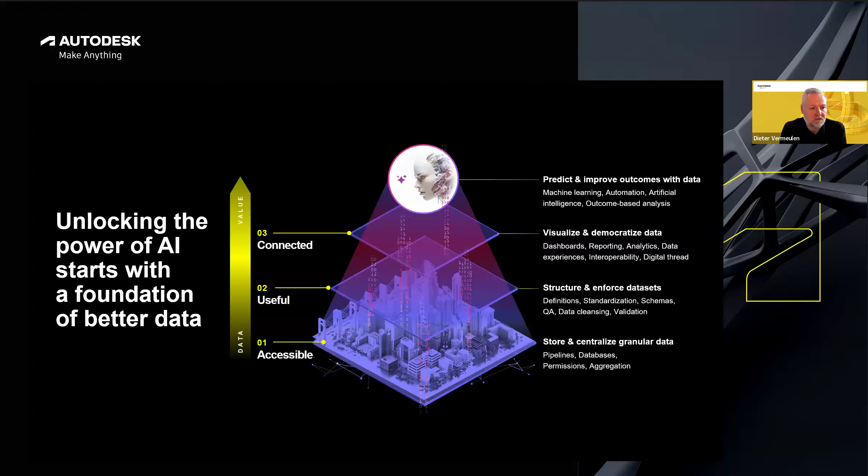But what does better data look like? We're moving beyond monolithic files toward granular information that cloud platforms can route to the right person and at the right time. Things like object counts, properties, materials, context, all of that available anywhere.

And by breaking design data into these small portable pieces and enabling interoperability, we make data accessible, connected, and useful. And the payoff, it's very straightforward. You get better decisions, less rework, and you get more trust across teams and stakeholders.

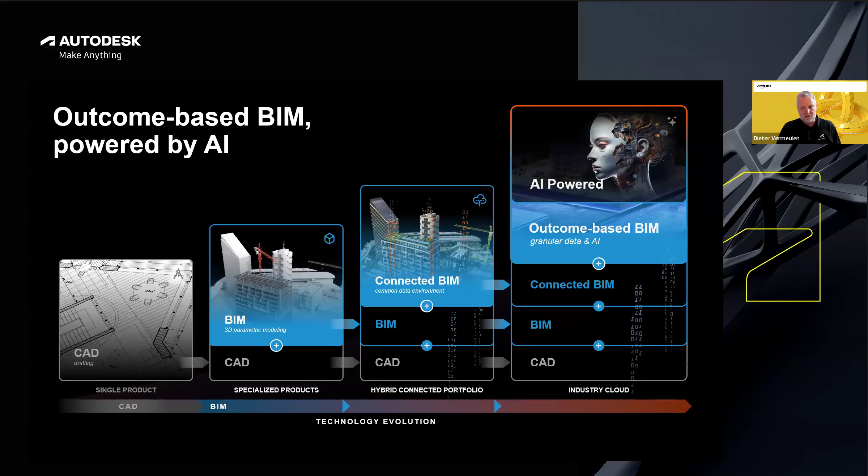Now, to unlock AI's promise, we need that right data foundation. First, we store and centralize granular data with the right pipelines and permissions. Secondly, there is structure and governance where definitions, standards, and quality checks are very important. And then we have this third layer, which is visualization and democratizing this data with dashboards, analytics, and also interoperable experiences.

And on that foundation, AI can automate the mundane, surface insights before decisions, and help us design and deliver more sustainable and higher quality outcomes. And all of that in a consistent way.

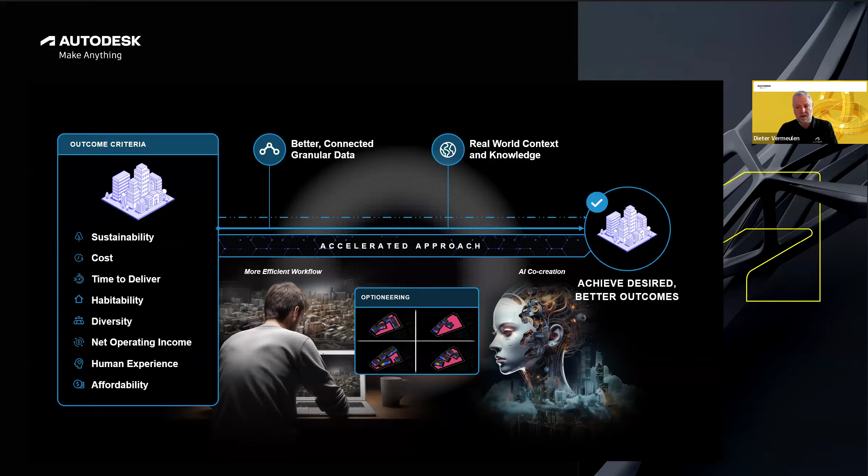Now at Autodesk, we are leading the way with the introduction of this new approach that we are calling outcome-based BIM. We started 40 years ago already with CAD and moved to BIM, where 3D parametric modeling was introduced. Connected BIM is where we started to include BIM into a common data environment. And then this outcome-based BIM is where we are going to use that granular data.

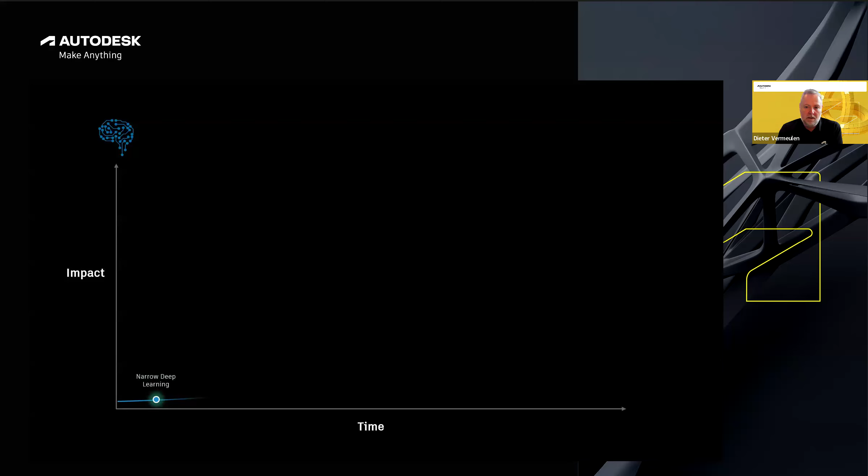And this innovative approach is integrating AI as a co-creator alongside the conventional model-based method. It's designed to empower AECO practitioners to define project success and overcome competing criteria.

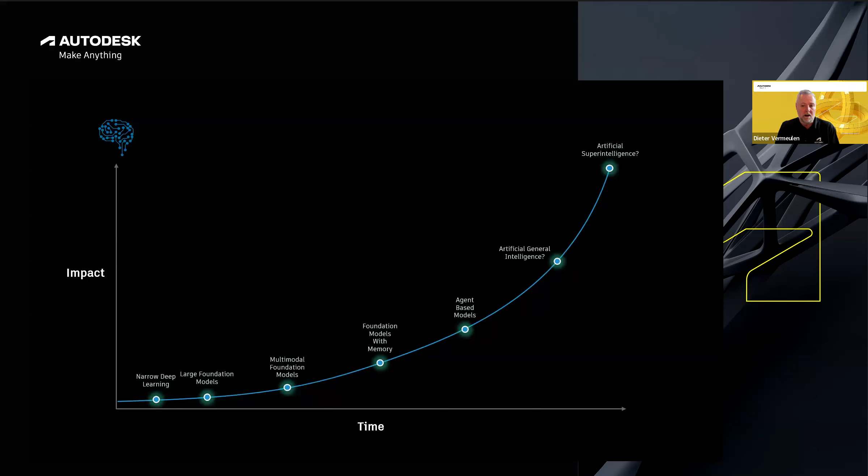Now, here is an example of what the future of BIM will look like. With outcome-based BIM, teams will define upfront their desired outcomes for the project. So things like maximum cost, sustainability impacts, or the method of construction.

Now, while AI generates a range of options to meet their criteria, and using AI-enabled analysis, firms are immediately getting insights into the impact of their decision. And they can shortlist the best options then.

So I want to be clear here, outcome-based BIM is not a replacement of model-based BIM. It's just a powerful additional way of working that will complement a model-based approach, and all of that powered by AI.

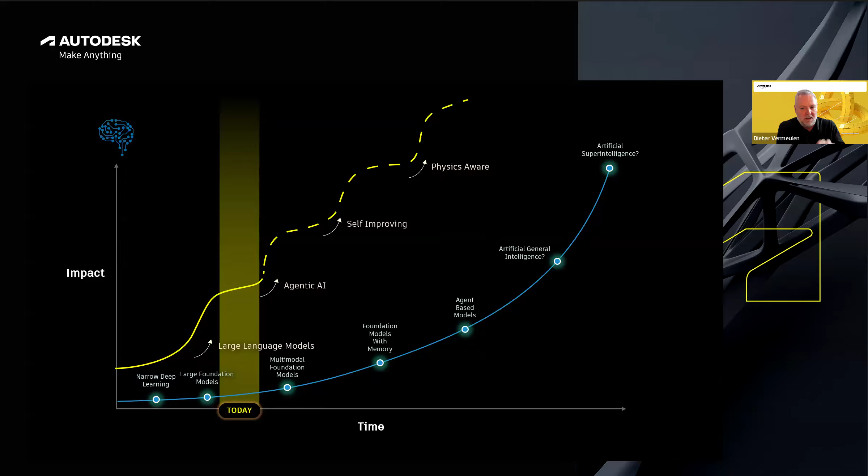Now, Autodesk has been researching and working in AI technology for over a decade. And if we explore the impact of the various AI models over time, we see that it started already with the narrow deep learning, and it goes further until what we know, artificial superintelligence maybe.

And what we want to see in here is that these are intriguing questions about the future of AI, including those possibilities of AGI, artificial general intelligence. And it's evolving and it will continue for many years.

We are just at the start of a new computing paradigm. Large language models, or LLMs, are the foundation of this modern AI. And they provide the intelligence to understand, reason, and generate language at a scale. So you can think of them as powerful text engines that can answer questions, summarize, translate, or even write code. So the LLMs are what we call thinking and understanding.

Now, today we are already a step further, especially within Autodesk AI. We are in the domain of agentic AI. And this is taking it one step further in terms of AI intelligence. So instead of only reacting with answers, agents can actively pursue goals. So these agents are making decisions and taking actions.

Now, while AI may seem like a new topic for our industries, Autodesk has been working in that AI space for over 15 years now. After publishing our first research paper on AI for design, for generative design at least, in 2009, we established our AI lab in 2018.

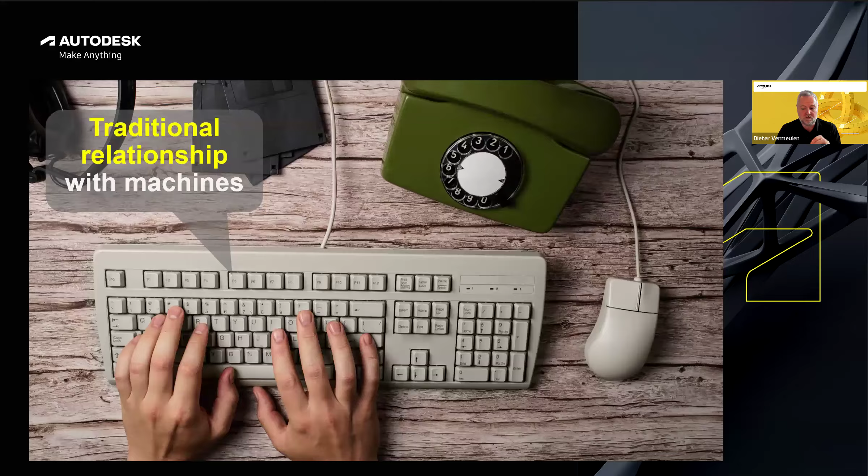In 2019, generative design officially was launched as a product. And in 2022, we published a 3D machine learning design file dataset in partnership with MIT in Boston, inviting other researchers to begin training their own 3D models. We then announced our first experimental generative AI model, which was called Project Bernini, at AU in 24. And now at this year at AU 25, we also announced Autodesk Assistant.

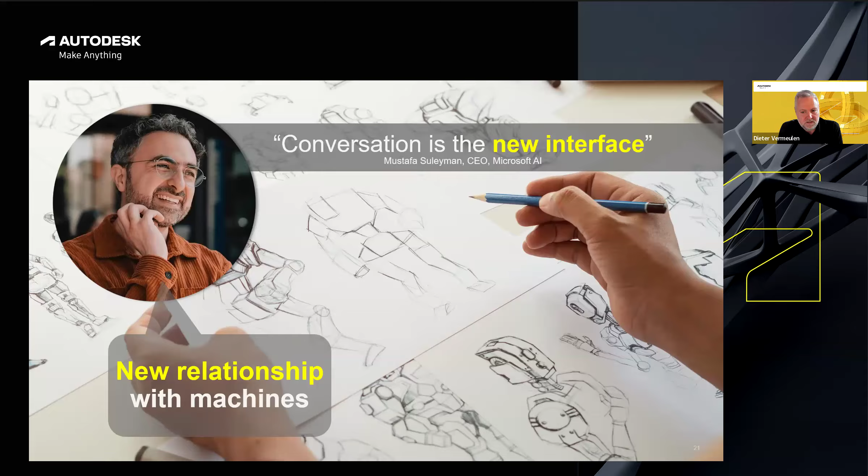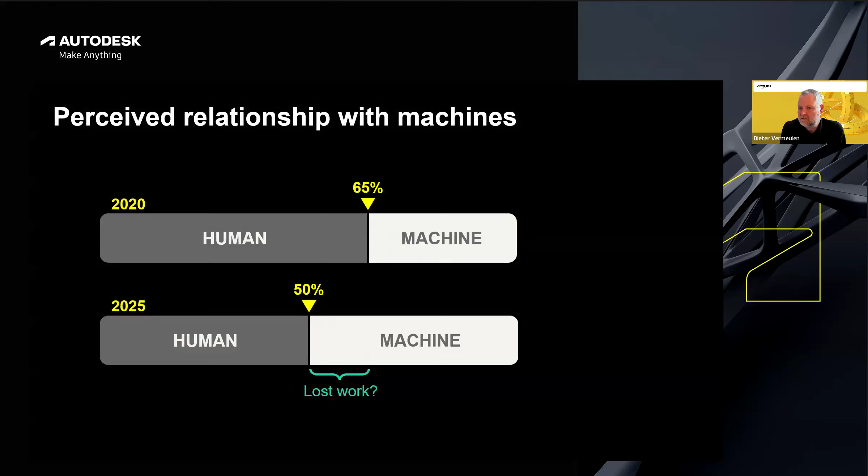Now, also something important in the development is that there is nothing more general purpose than creating that new relationship between humans and machines. As technology users, we have always had a relationship to machines, but telling a computer what to do is very hard. Until recently, our relationship with machines has mostly been limited entirely through this narrow interface of a keyboard and a mouse. We've normalized reducing these complex ideas and computing them in obscure ways. And that's starting to end, especially for creative professions, where it's most overdue.

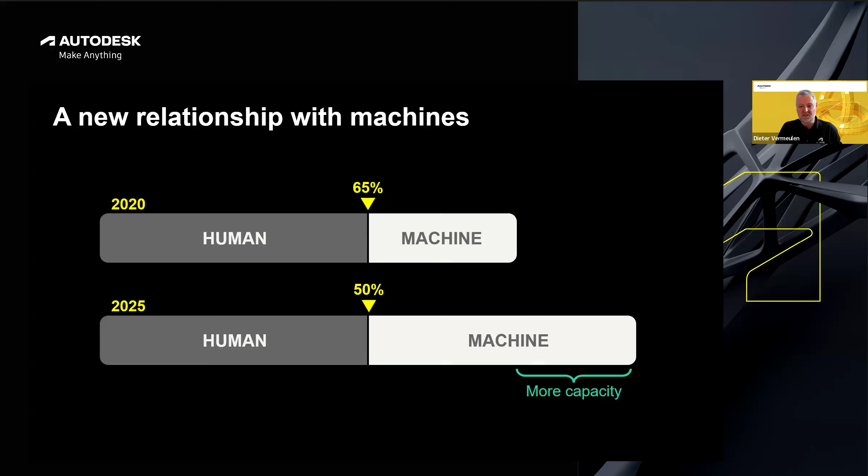So why is this moment with AI so unique? There is a new paradigm emerging that changes everything, which is the use of natural language and natural expression to interface with machines. As Mustafa Suleyman notes, conversation is the new interface. In other words, we will be interfacing with software in much the same way that we interface with each other. And the interface is growing even further, beyond natural language, to include hand-drawn sketches, gestures, photography, and even more.

So how does this new relationship affect the future of work? Well, the World Economic Forum thinks that we are on the cusp of crossing a threshold where machines do a larger part of a given task than humans. Many professionals we speak with fear that this represents lost work. However, while this may be true in some domains, the more optimistic picture is that for the same amount of effort from a human, the human-machine team can accomplish much more. In other words, humans and machines together can unlock additional capacity to do more with less.

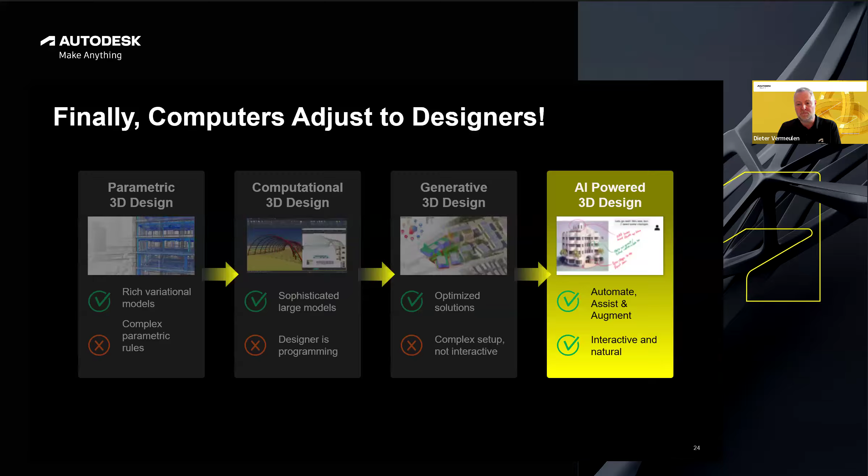And this is why it's so important that employee development is at the center of your AI strategy. Make sure that your employees know that your AI vision is one focused on developing skills, cultivating talent, and rewarding innovation, and not replacing workers with technology, AI or otherwise.

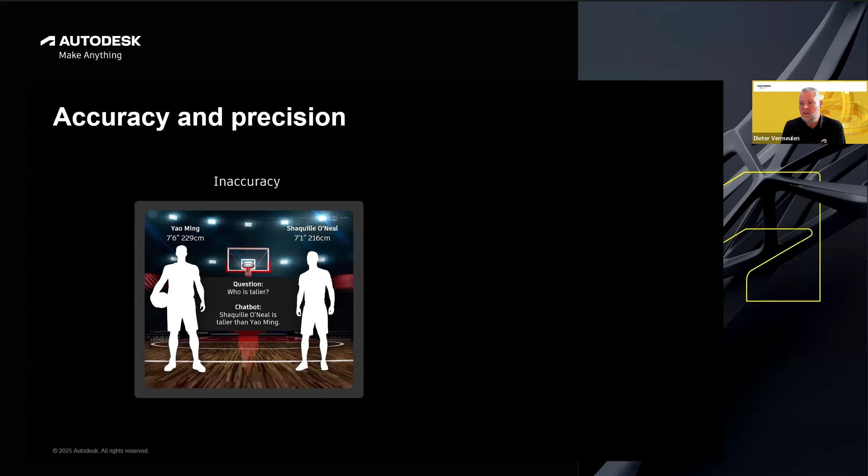Now, decades ago, computers began to support parametric 3D design, and that offered lots of rich variations, but it required quite complex rules. Not long after, designers could begin to create much more sophisticated large models, but you had to perform some programming. And later, Autodesk customers began to use generative design to explore optimized solutions. Now, however, the expertise and time required to set up these explorations was quite significant, leading to only a handful of design teams adopting this technology.

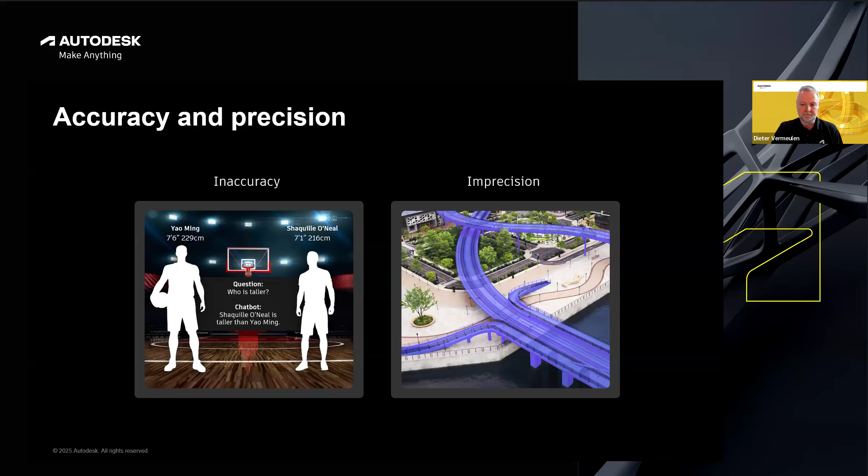Now, today, we are seeing the beginning of truly AI-powered 3D design, where humans can interact more naturally without having to create these complex rules and program the software or set up complex configurations for it. So we can now communicate to machines in a more natural way, and this is helping us to automate, assist, and augment the design process. Now, this is not a linear sequence, but a disruptive change compared to the other design methods.

Language models are learning the patterns of language at a scale that is incomprehensible. But it still doesn't understand the meaning of tallness. It understands the patterns of how you might talk about tallness. And it responds as if it understands tallness, but it doesn't. The model cannot even give you a measure of accuracy, because it doesn't understand the concept of tall. And this is what we see in this example.

Imagine you use these kinds of tools for critical infrastructure that really demands accuracy and precision. That would be quite a difficult proposition, because imprecision for critical infrastructure is not desirable. You can't approximate a bridge design. This must be controllable and you need to be able to measure it. You must ensure that a trained professional can inspect the design, understand it, and certify it as viable engineering.

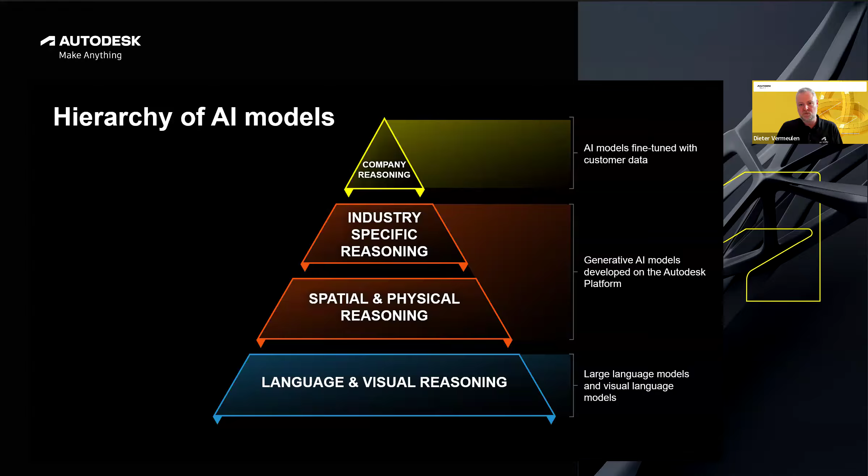Most of the amazing capabilities provided by AI tools such as ChatGPT or Copilot are powered by large foundation models. These are shown at the base of this hierarchy, and they will become instrumental parts of the enterprise level technologies that our customers are creating and our customer-facing solutions.

Now, Autodesk's unique role here is to provide the specialized foundation models in the second layer, the red layer you see here. This layer is capable of reasoning about a spatial and structural world, which obeys the laws of physics. In the third layer, Autodesk aims to build foundation models with industry-specific reasoning, on how things are physically made or constructed.

In other words, how a factory may manufacture a product or how a construction site might schedule a specific part of a job. These are the standard pieces of the puzzle that Autodesk aims to provide that build on the existing language and visual foundation models.

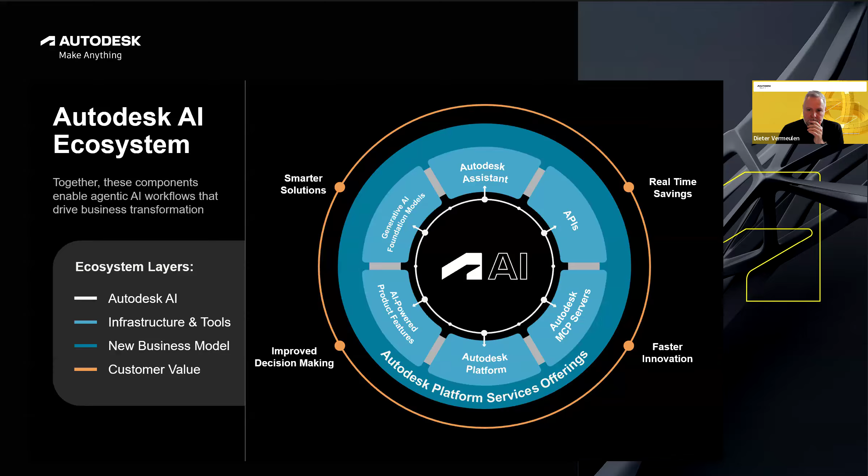Finally, in the last layer, we expect that our customers will be able to aggregate, align, and customize any of these models, just as they are with language models today. This is needed to customize to their company-specific data, to customize to specific workflows and approaches. And these AI models will be fine-tuned by that customer data.

So what is Autodesk AI doing here? We bring in this Autodesk AI ecosystem, bringing together all of our AI capabilities, from tools like Revit, AutoCAD, Maya, to the new Autodesk Assistant, into one connected platform.

Empowered by our Model Context Protocol, Autodesk AI securely links these design tools, APIs, and generative models to enable agentic, machine-driven workflows. It's not a separate piece of technology, it's one ecosystem designed to help our customers work smarter, innovate faster, and deliver better outcomes across design and make.

Now, we deliver these AI capabilities to the AECO industry already in various ways. Our approach is multifaceted. We combine several types of AI and kinds of productivity tools to drive that innovation and efficiency.

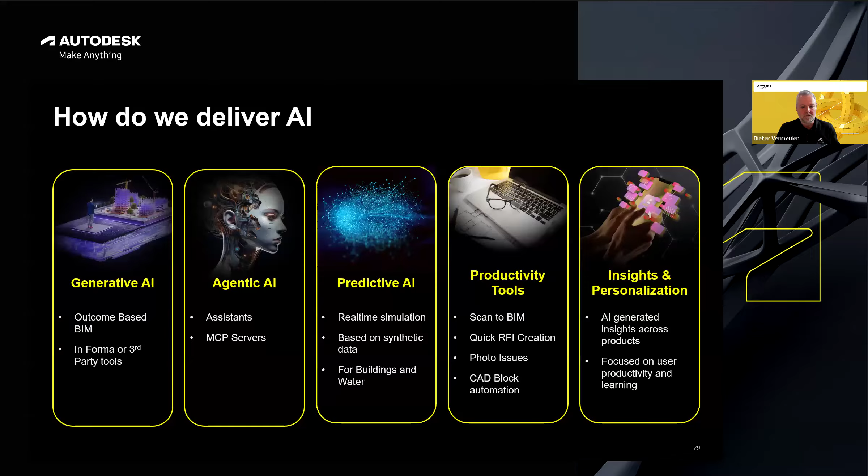The first step here is generative AI, where we create new content, designs, and solutions based on user inputs and learned patterns. It enables rapid exploration of design alternatives and automates complex tasks.

With agentic AI, these are systems that plan, decide, and act autonomously to achieve goals. Autodesk Assistant is one of the examples I'm going to show you a bit later.

There's also predictive AI. Predictive AI analyzes data to forecast outcomes, identify risks, and optimize decisions. Examples include real-time simulation and insights for buildings and water projects.

And we also have productivity tools where AI is embedded in tools to, for instance, automate repetitive tasks, streamline workflows, and enhance user productivity. Examples include scan to BIM workflows, quick RFI creation, photo issue detection, or even automation of AutoCAD blocks.

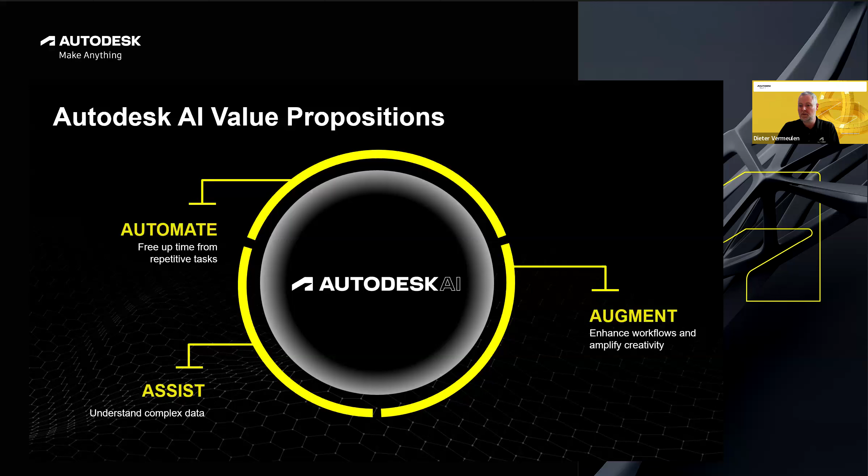And then the final part is insights and personalization, where AI delivers personalized insights and recommendations. We help users learn faster and make better decisions. These insights are available across Autodesk products, focusing on user productivity and learning.

Now, when we talk about Autodesk AI, we are not just talking about automation. We're talking about empowering designers across that entire design and make journey. AI handles the tedious tasks with automation, like cleaning geometry, placing blocks, or interpreting markups. All of that means less time clicking and more time creating. It's about freeing you up to design, not just to draft.

Autodesk AI is also augmenting your workflows. It's suggesting more efficient commands, exploring design options, improving accuracy. It's not replacing your creativity, it's amplifying it.

Finally, Autodesk AI is also assisting in making sense of complexity, drawing insights from data, usage patterns, and performance. It turns information into actionable decisions, so you get faster insights and better solutions. This is the future of our products, powered by Autodesk AI, and it's already here.

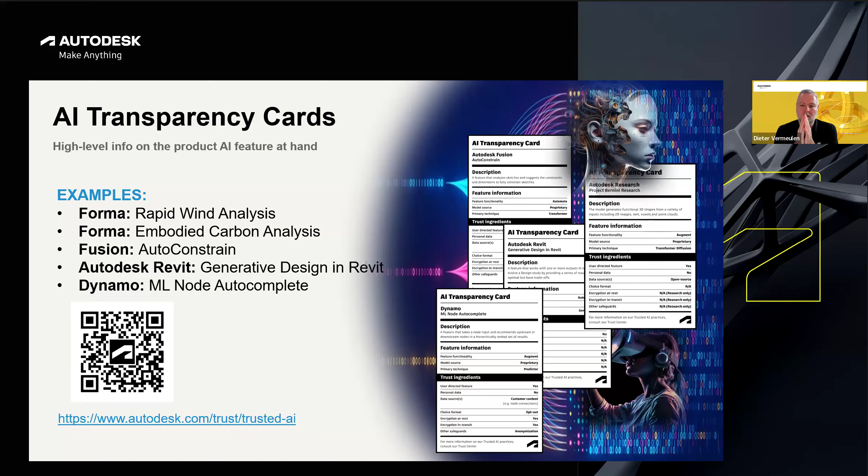And therefore, and it's still a work in progress, but we are developing these AI transparency cards that you can access here through that QR code.

The majority of the Autodesk AI tools do not employ machine learning, and those that do often use Autodesk data or synthetic data and data that is purchased or free to the public. So still some of these tools do use customer data to train AI models, and Autodesk is transparent about what data we are using from your way of working.

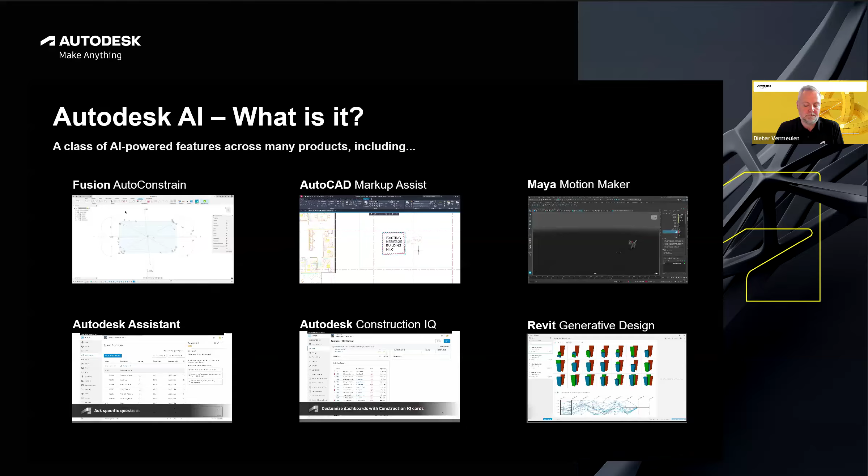For example, Autodesk may train a machine learning tool with the dimensions or measurements of a manufactured part that CAD users typically add to their drawings. Now, adding dimensions is not very creative work. It can be very time consuming and error prone. So this is a terrific opportunity for us to automate that task, to streamline the process and increase your capacity to do more creative and valuable work.

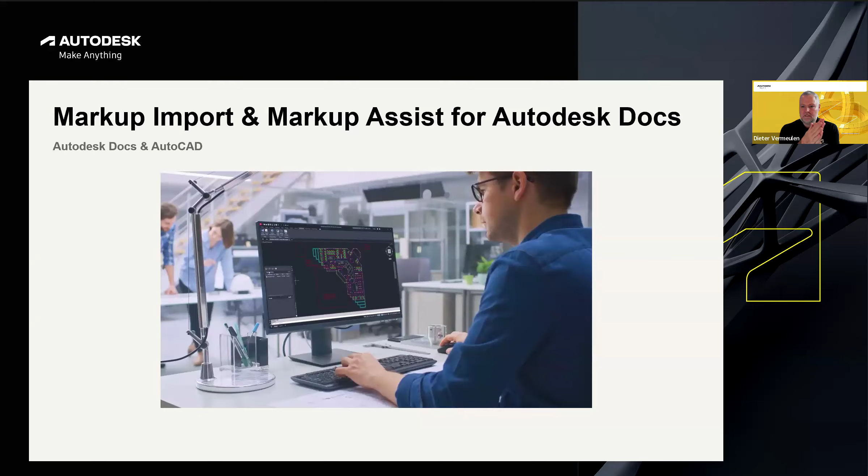So Autodesk AI, what is it then? Well, it's not a single technology. It represents a class of over 40 AI-powered features across multiple products. And in order to be labeled as an Autodesk AI feature, the technology must meet some of those criteria.

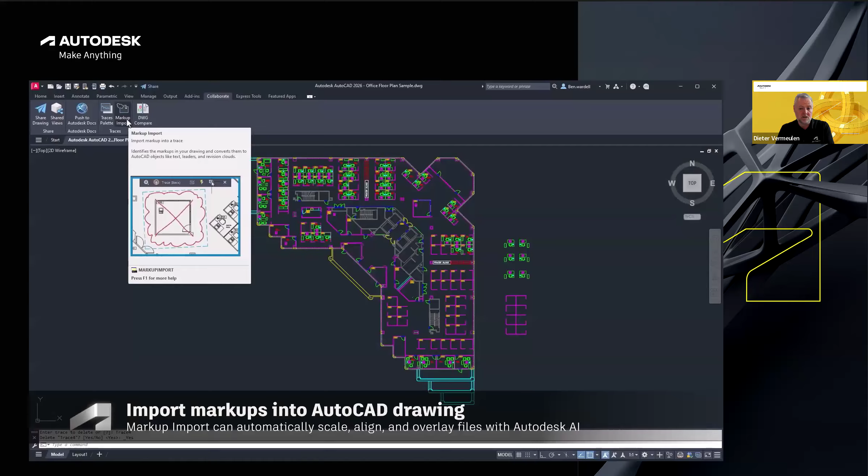For example, is the feature in full compliance with our trusted AI standards and governance? Was the feature built on top of Autodesk's internal AI development platform to ensure it has the necessary safeguards? And is it highly performant? Does the feature meet or exceed the threshold or efficiency gains? And so on. So not all AI-powered features at Autodesk meet these criteria, especially technology we gained through acquisition.

But those that do are labeled as powered by Autodesk AI. You can also find them on that trust site.

Now, let's have a deeper look now. I gave you a bit of background. I gave you a bit of key concepts of AI. What is Autodesk doing with it? Can you trust that data in there? Well, let's have a look also on the capabilities we currently have in our AECO products.

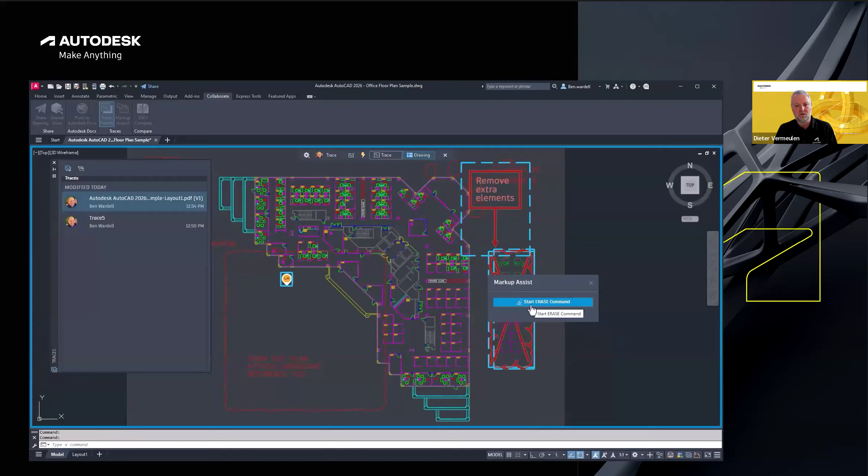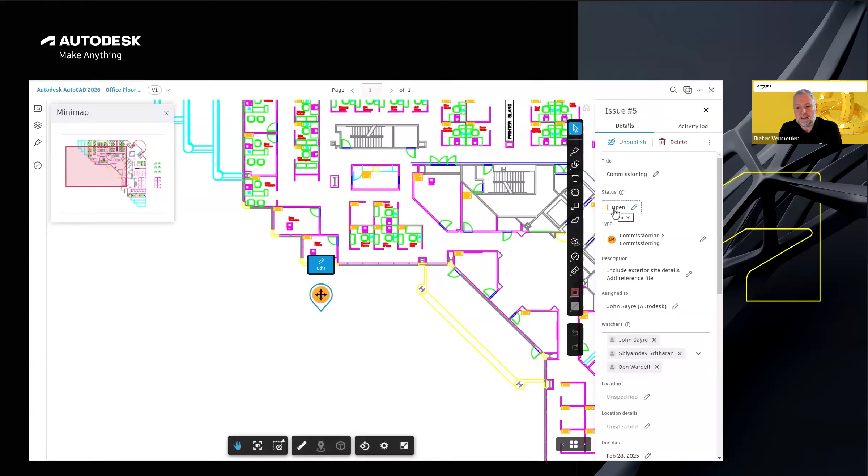Now, with AutoCAD 2026, collaboration and design review became faster and more efficient thanks to that markup import and markup assist tools. So you can now extract red lines and comments directly from PDFs or image files like JPEGs, PNGs. And once you import them from Autodesk Docs, the markup assist is automatically detecting handwritten or digital markups and notes that are placed on that drawing.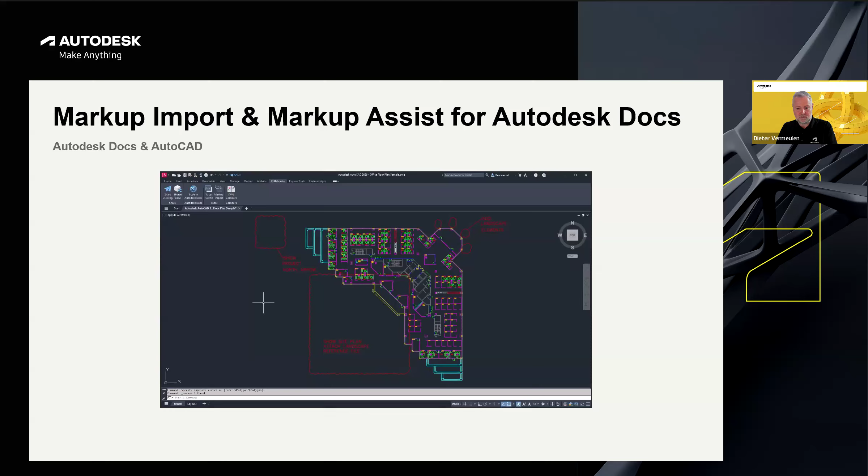Now, these can be imported straight into this design file. You can include comments, you can include revision clouds, and you can also choose exactly how they are displayed, like you see in here. Now, the imported markups aren't just static images, they become active elements in your drawing. Specific geometries, such as cross-out shapes, they can even trigger functions like delete.

But this one here. Give it a moment to sync the markups to AutoCAD. Give it a command, and AutoCAD will automatically detect that this is the erase command that you want to have in here.

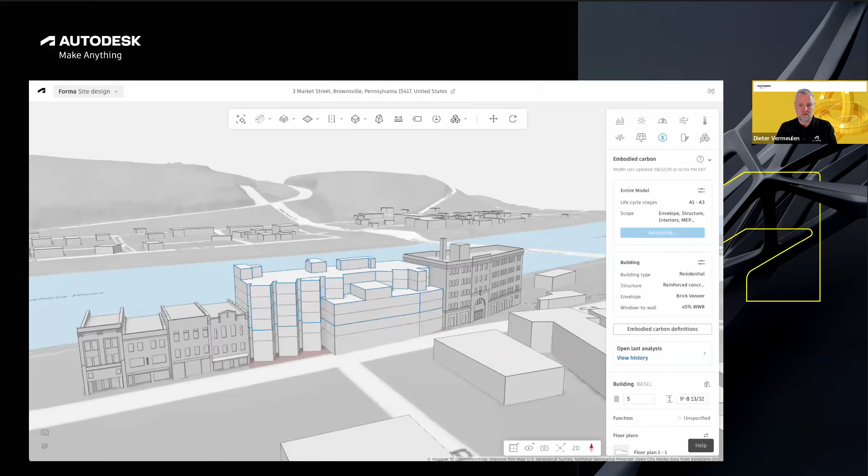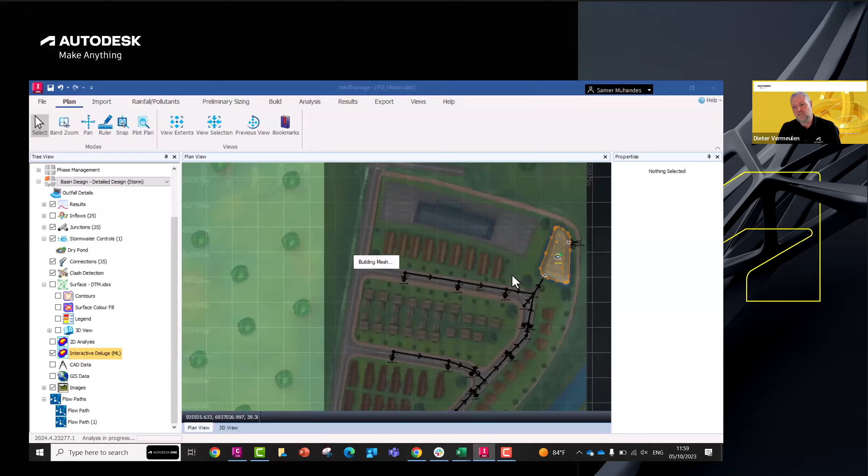So you can also bring in markups and issues that are created, like it showed in Autodesk Docs. So you can view them directly in AutoCAD on that trace layer. You can manage them without ever switching applications. The trace palette shows which files have been accessed along with the current status of any updates in Autodesk Docs. So altogether, markup import and markup assist help you to automate the design review process and to streamline collaboration in here. Feedback is seamlessly incorporated into your AutoCAD drawings.

Now, all of this, you might not think about it, but all of this is powered by Autodesk AI.

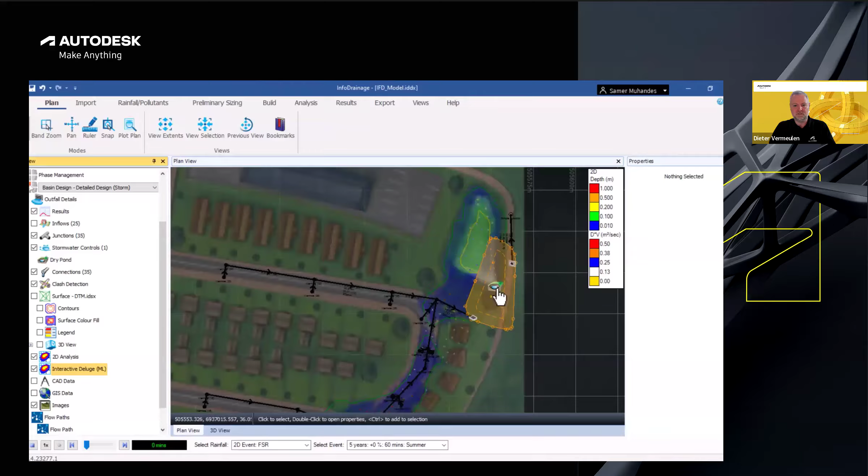Let's have a look at Forma and the embodied carbon site design. Architects are pressed with the challenge of reducing the carbon impact of designs, right? But this type of assessment is very costly and it's often highly technical. Now, with this new feature within Forma, designers can use intuitive AI-powered analysis to better understand the carbon impacts of primary material choices you have in here, but also the building form, and this at the beginning of a project planning process.

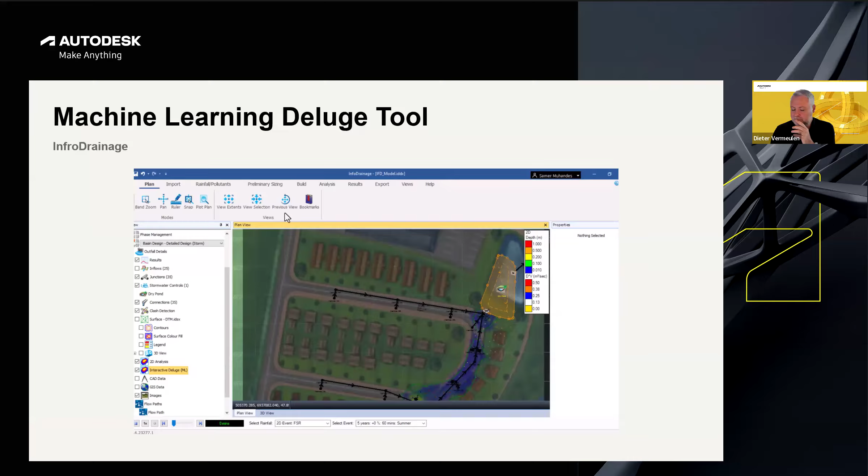So this is going to reduce costs already, and it's improving the overall sustainable outcomes at the start. So you reduce embodied carbon impact from building designs, and you can see the results of decisions already at the planning phase. That's the part where you save time and money later in the project.

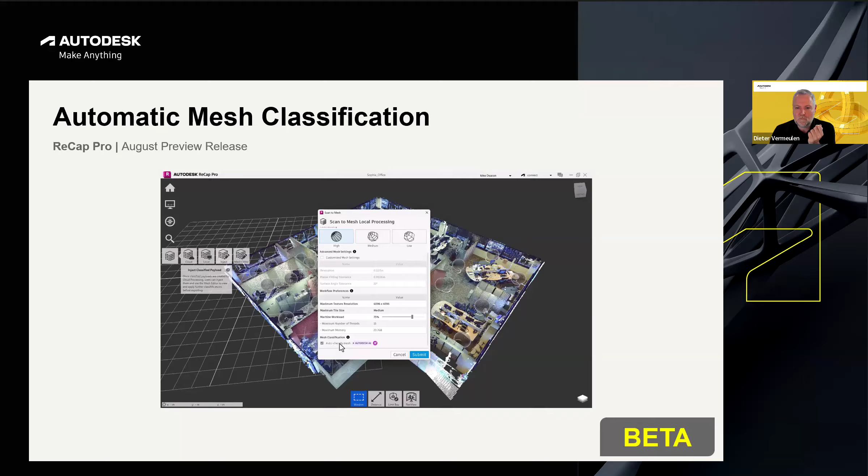Another tool that is using Autodesk AI is the machine learning deluge tool in InfoDrainage. This tool enables designers to predict flood maps quickly and accurately when applying water on the site surface, all while leveraging new built-in artificial intelligence.

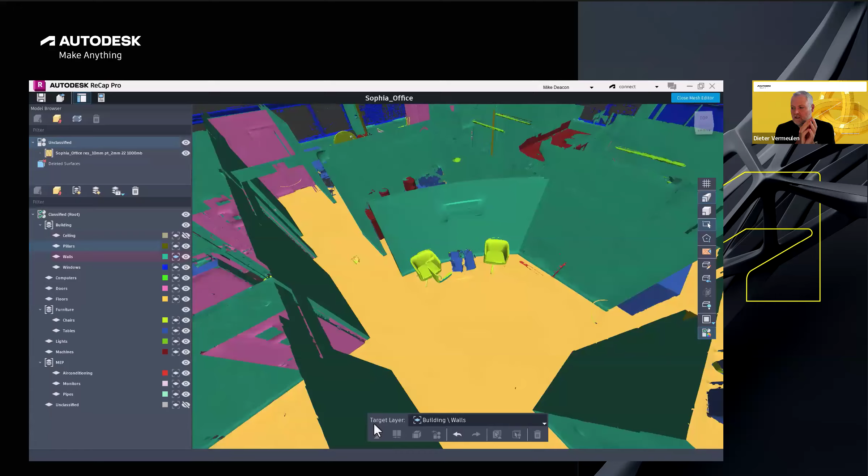InfoDrainage's machine learning algorithms, trained on more than 10,000 traditional simulations, identify the patterns between the ground model and the resultant flood map. Then they present the user with a flood map showing hotspots, which can be used to establish the best location for storage structures and stormwater controls like ponds, swales, or rain gardens, helping you make more informed design decisions about optimal areas for stormwater control.

It helps infrastructure owners and developers avoid problem areas, giving you faster site analysis for a more efficient design process.

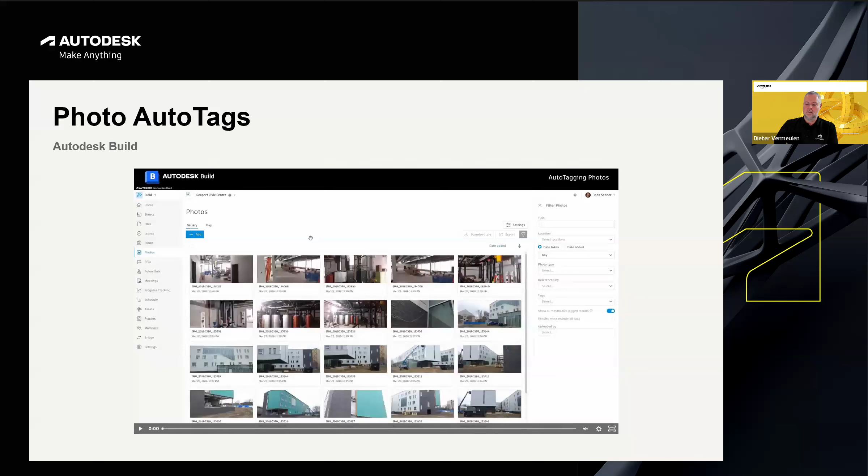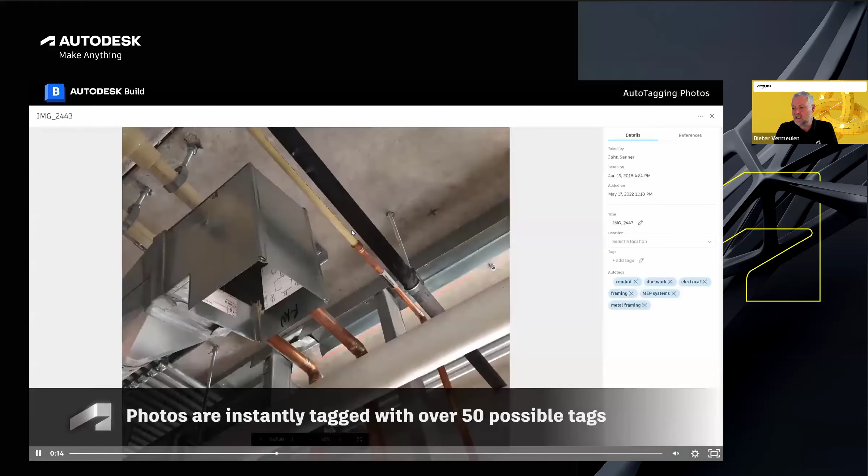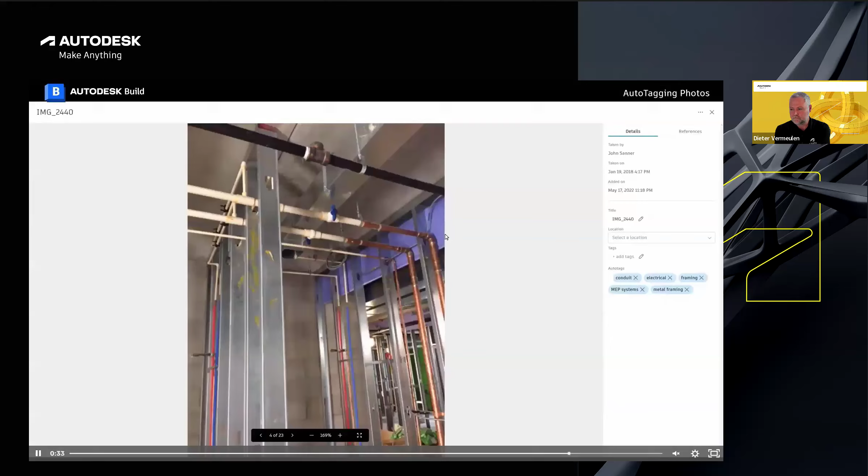Now, something that's existed for quite some time is photo auto tags in Autodesk Build. This leverages artificial intelligence to automatically add tags as metadata to your photos within Autodesk Build. This saves your team's time and allows them to rapidly organize and access images needed for tracking.

The photo tagging can also be used to create outcomes like tracking progress, dealing with claims, disputes, releasing payments, improving handover, and so on, promoting health and safety, as you can see here. So very easy to use, and also powered by this AI.

Now, next step is Autodesk Assistant. That's our next chapter here. What I just showed you are all capabilities that use Autodesk AI in the background, so there is no active or interactive engagement with it.

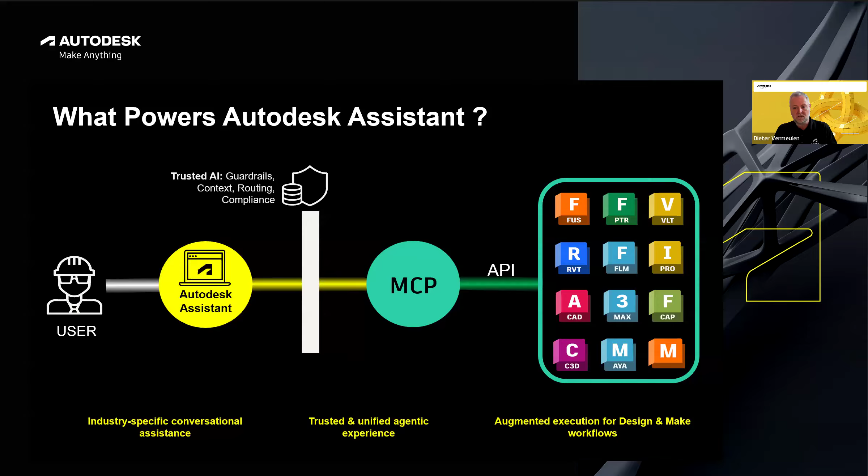So the Autodesk Assistant is embedded in the tools and products you already use, so you don't need to switch programs or break your flow. Finally, there's also the augmentation of execution and tailored design. With Autodesk Assistant, you'll move faster and unlock the ability to do more, because under your direction, it can tackle design tasks in real time as this kind of trusted partner.

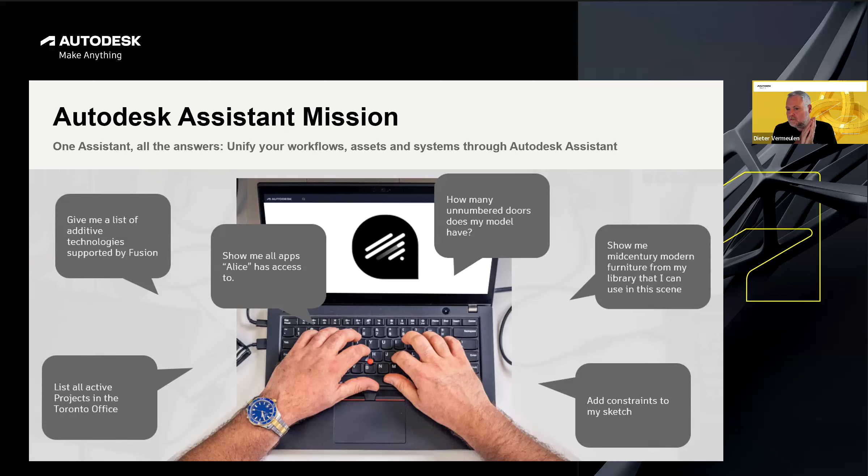So it's a context-aware and intelligent assistant that enhances productivity. It provides real-time insights, so it's augmenting, and it proactively recommends actions to optimize project outcomes. It passes user prompts to a collection of domain agents and what we call MCP servers, which return personalized contextual responses in real time.

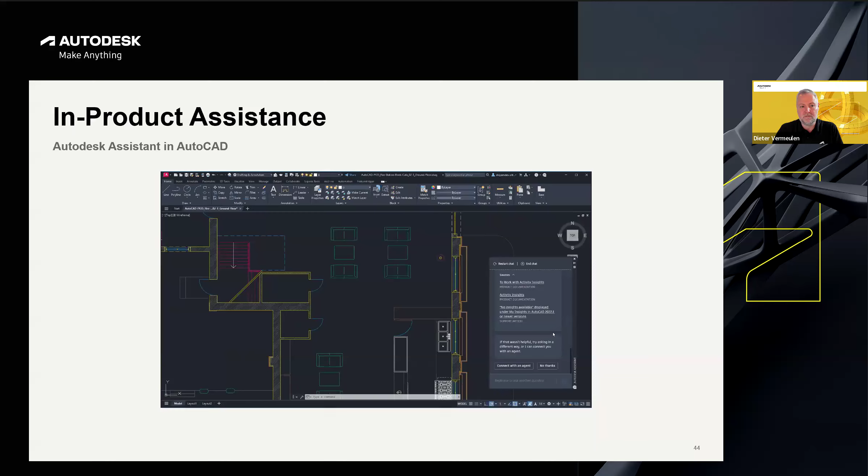And we've built in guardrails so it will only answer Autodesk-related questions. It routes prompts through an orchestration system to ensure that the right agent or MCP provides the best answer, so it understands its context. It knows what product you're in, what file you're in, and it will respond based on this context.

Now, soon you'll be able to reference third-party tools for more customization—think company standards, building codes, past projects, and so on, and things that are only available at your company. So Autodesk Assistant is secure, safe, and it complies with your privacy settings.

Ultimately, we envision a single assistant that can answer all your Autodesk-related questions. It will partner with you on cross-product workflows, code checking, model updates, and coordinations. So it's one assistant with all the answers.

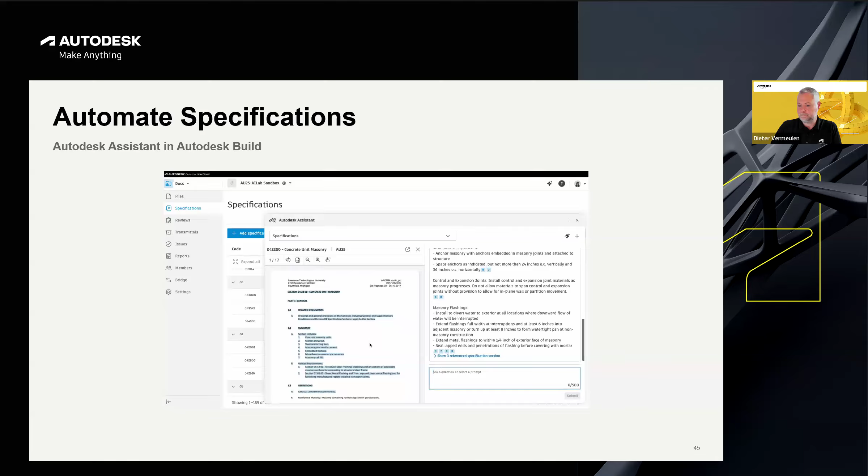We already know Autodesk Assistant within AutoCAD as an assistant that helps you find how to do specific tasks. So how do I find the activity insights, for instance? This one tells you right now, in your current version of AutoCAD, how to access a specific tool and where to find more information about it. That's what we call in-product assistance.

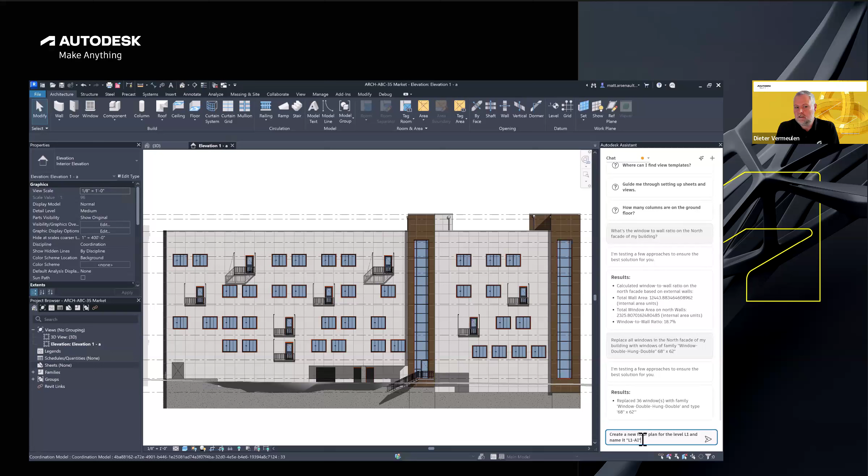You'll find example questions, or you can type your own. Autodesk Assistant will find and summarize all that relevant information for you, including pointing you instantly to the right specification through direct links. So it's available to all the project stakeholders on the web.

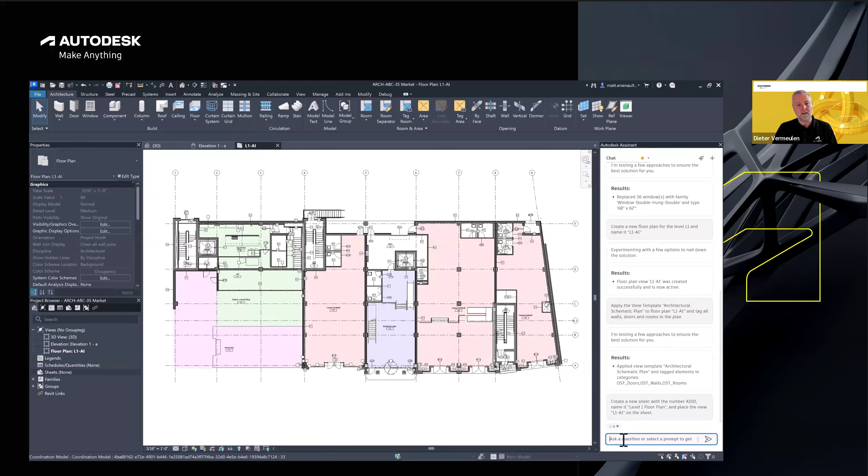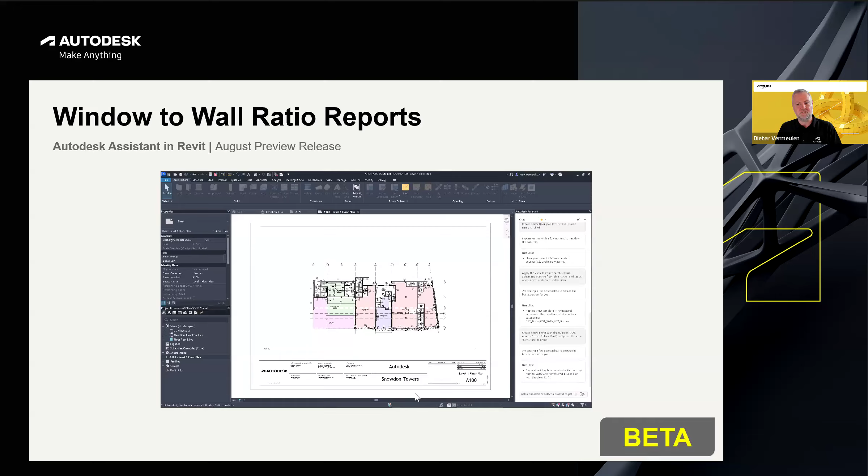Another example of Autodesk Assistant is the one within Revit, also available in preview release. Here we see how it's working. We use Autodesk Assistant to inquire about the window-to-wall ratio of a specific facade of that building. Here we even indicate that we want the north facade. So Autodesk Assistant is actually using that project information to find the proper facade, calculate the area of the windows, and then ultimately give you the result of that window-to-wall ratio.

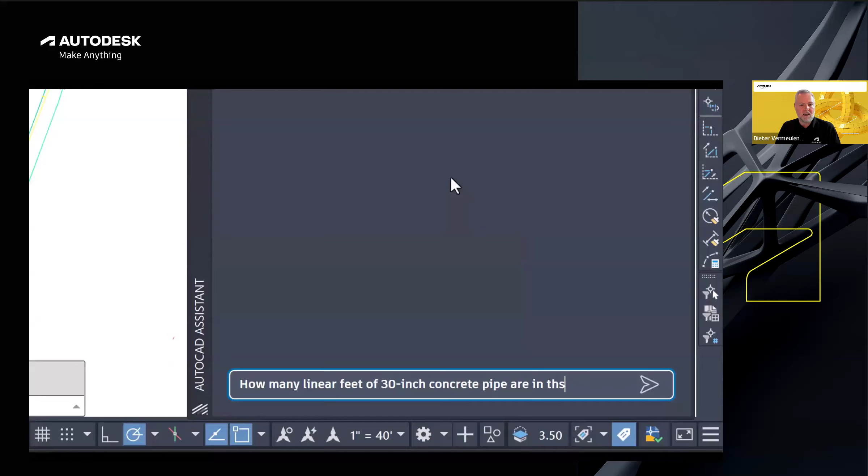You can also ask to replace the windows with another type of family, for instance, or generate floor plans, like what we see here. We have this kind of floor plan, and we want to increase the quality of the view of that floor plan, so we can also ask to apply a specific view template to it.

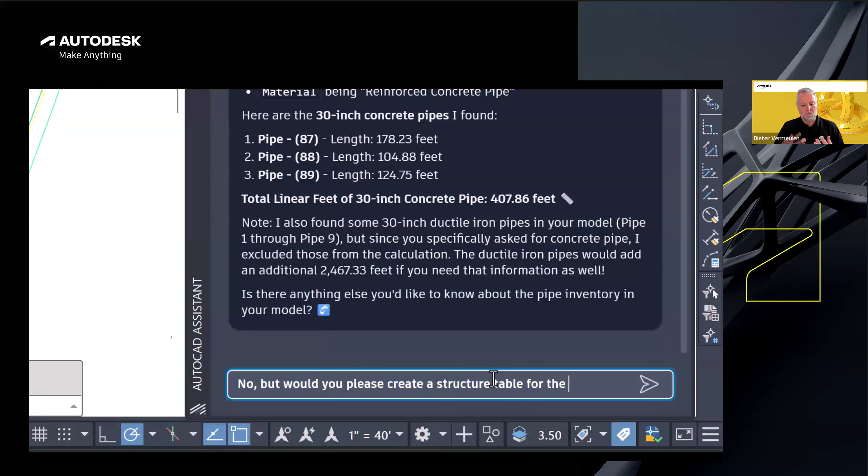What you see here is that new interface—the way that we communicate with the products. We are using a keyboard to type the prompt, but imagine that you can talk to it, just talk to Revit, telling it what to do. That's what the future will look like.

Ultimately here, you're also generating a sheet with that view. Imagine performing this task where you ask to generate all the sheets for all the levels of that specific project.

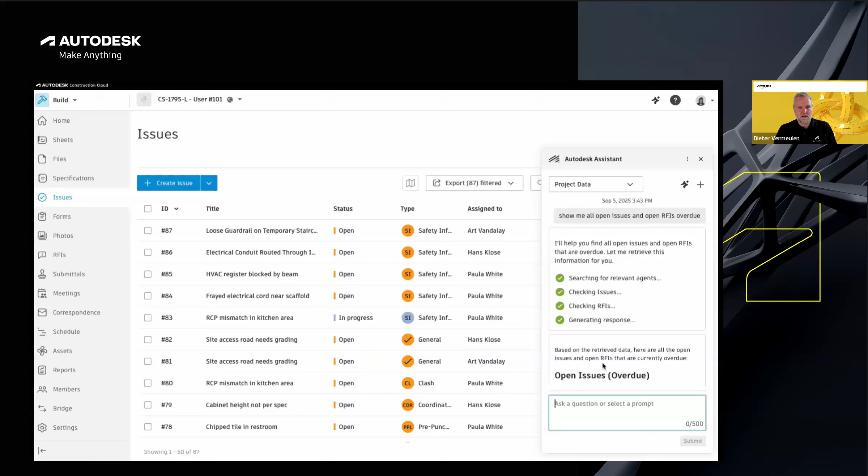In another example, we are using Autodesk Assistant in Civil 3D. Again, this one is also a preview release. Here we see how easy it is to interact with the model and ask information about it regarding pipes and their slope, for instance.

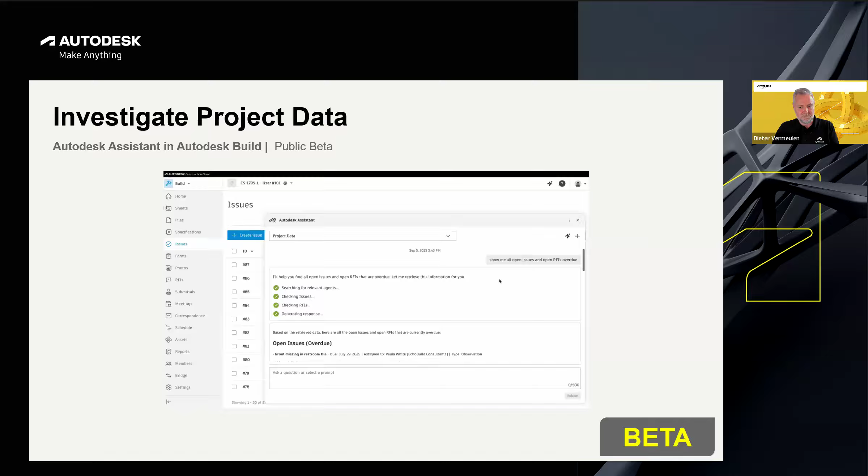Just type in what you want to have. Autodesk Assistant makes contact with that Civil 3D project, actually looking into the model to find the proper information, and gives you a list of all the specific pipes you have. It even asks if there's anything else you want to know about this pipe inventory.

Maybe it will also come up with suggestions, like asking if you want it to create a system from it, or a structure table. And there you go.

Well, let's have another look at another public beta, which is the investigation of project data in Autodesk Construction Cloud. You can ask questions about the project's RFIs, submittals, issues, schedules, change orders, and get instant answers.

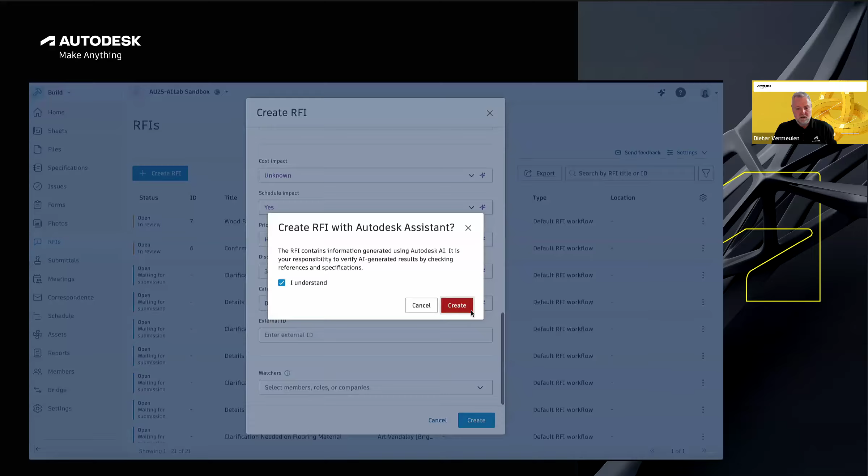In this example, we ask about all open issues and open RFIs. You could even specify more, like due this week, overdue, or specific to a trade. The result is instant, and it provides you with the right links to review all the retrieved data.

If we look at another of our latest advancements in RFI management, we now have this AI-powered assistant for generating RFI forms. Autodesk Assistant here is designed to simplify and accelerate the creation of the RFI.

It also indicates on that form which parts were generated by AI, so you still feel in control and can modify where you want. To improve the results, you can reopen the prompt box and refine it, or after creating the RFI, you can see in the activity log that it was generated using AI.

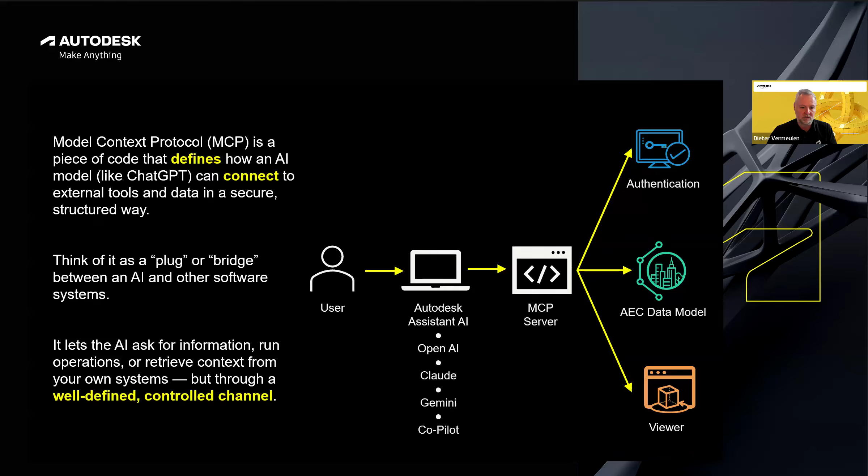Now, let's step into a new world. Let's go into MCP servers. These are the next step in the evolution of our API ecosystem. They give developers and ISVs a more structured and AI-ready foundation to build on, making it easier to automate workflows, integrate with our platform, and scale solutions without heavy custom work.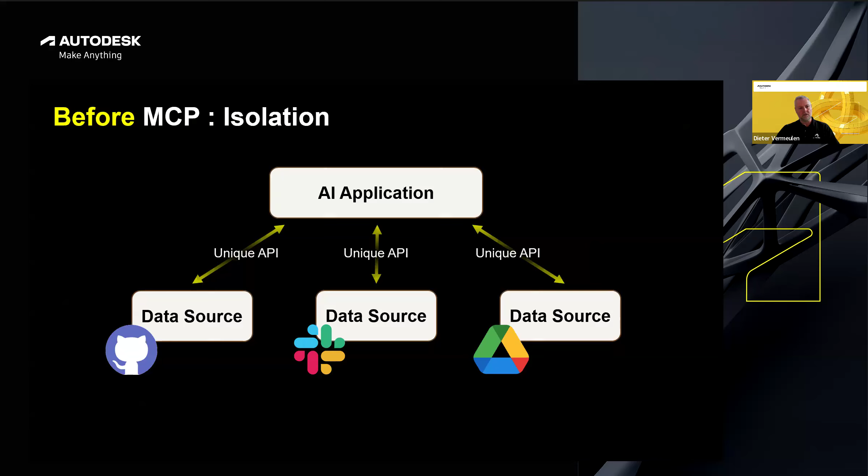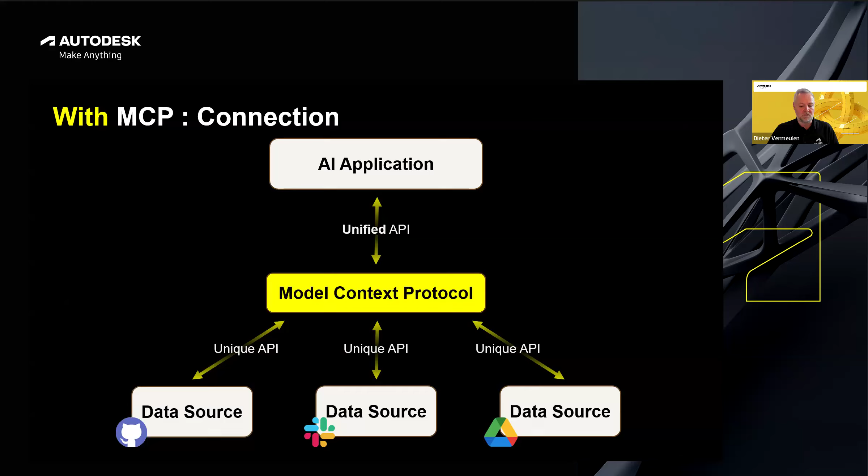MCP, or Model Context Protocol, is a standardized way for AI applications such as LLMs to communicate with external systems. MCP servers act like a translator, taking in language from multiple different systems and standardizing it into one universal language. So non-developers will experience more capable AI agents that can access relevant data sets and take action on their behalf.

There are two ways third-party developers can get value from MCP servers. First, you can build on existing MCP servers, or secondly, you can create your own MCP server to encapsulate your domain expertise or service logic in this reusable model-based format.

This functionality is planned for future release, so it's currently not available. Before some of you probably want to know, where is it? Where can I find it? Can I play with it already? Not yet. It's something that's going to be announced quite soon.

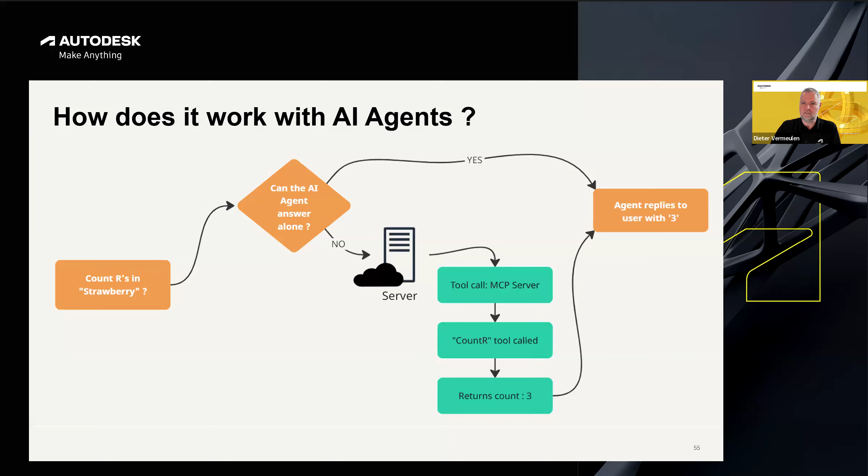If we look at the world before MCP, we have multiple data sources that each have their own unique API that connects with the AI application. Now with MCP, we generate a unified API, making it possible to connect any type of data source and use AI on top of it.

So this is a simple example of how it could work. Imagine we ask a question to an AI agent and ask it to count the number of letter R in the word strawberry. If the agent can answer on its own, it will reply to the user, yes, it's 3.

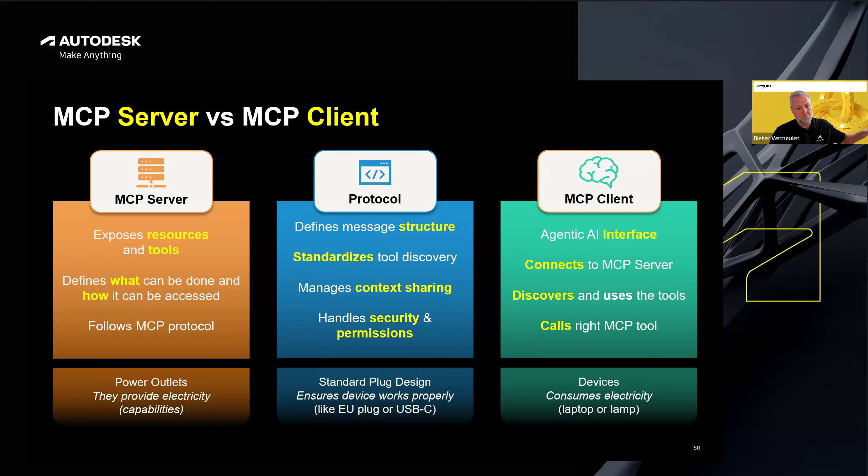If it cannot answer, it can connect to the MCP server, where you generate a tool called, for instance, count R. The returned count is 3, and the agent replies with it. This way, agents become smarter with tools that are not available by default in the large language model, by taking account on that MCP server.

There is a difference between an MCP server and an MCP client. An MCP server exposes those resources and tools, defining what can be done. The MCP client is the AI side, typically the large language model or agentic AI interface, like Claude, ChatGPT, and Autodesk Assistant. It connects to one or more MCP servers to discover and use their tools dynamically, interpreting the user's intent.

For instance, get the latest Revit model info, and then it can call the right MCP tool on that connected server to perform that action. Think of the client as a service consumer, the one who asks for and uses capabilities, while the MCP server is like a service provider.

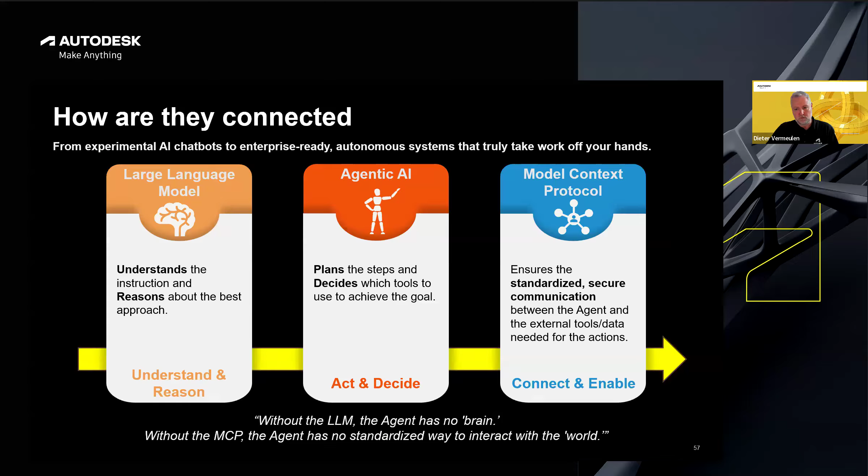Now, how is this all connected to each other? Because it's quite complex. Well, a large language model is where we talk about understanding and reasoning. It's a bit like a student taught with a million books, and you ask that student to write an essay. It will only write that essay based on those books. If you ask that student to perform an automated task like send an email including that essay, it will not be able to do that, because it can only give you information about what it has read. So it will tell you how to send an email, but it will not take that action.

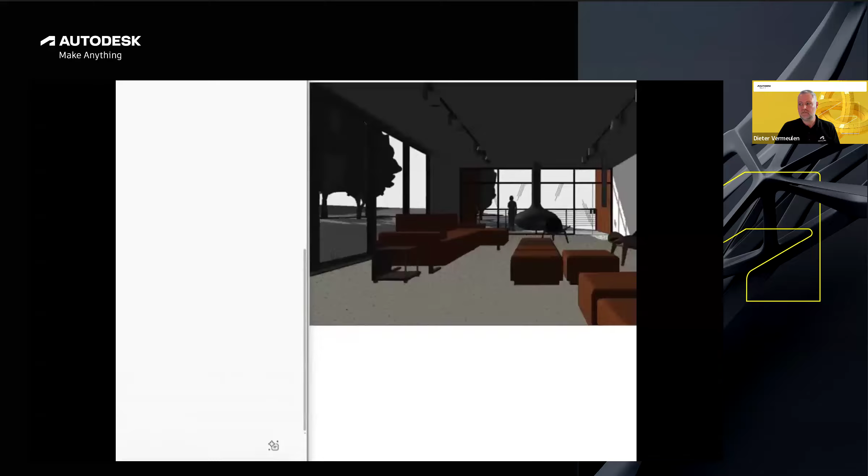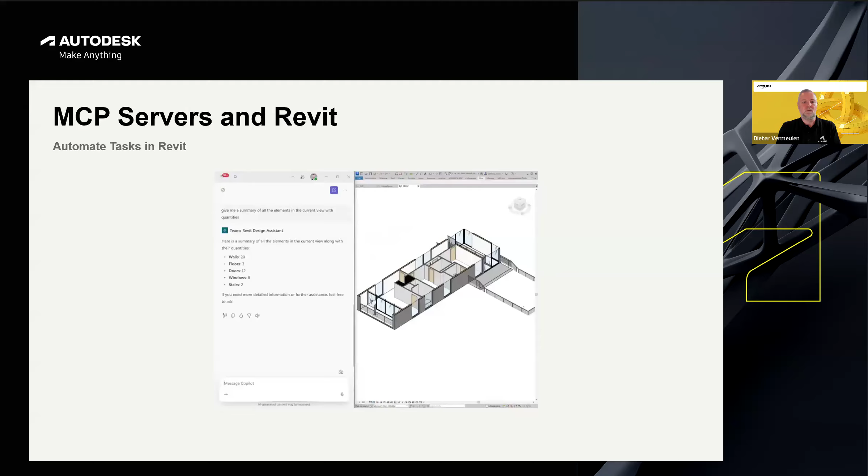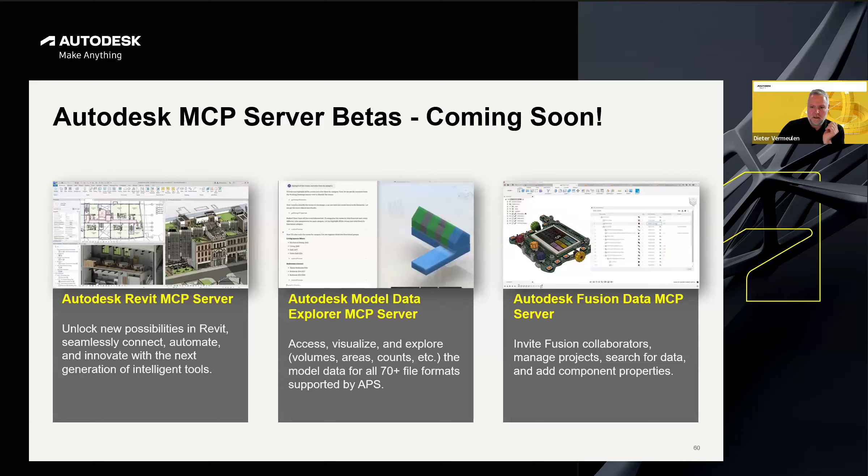Now, the key benefits of using Autodesk MCP in the future will look like this. The servers are built to Autodesk security and compliance standards, and they include authentication, permissions, and data safeguards. They are hosted, or will be hosted, by Autodesk, providing insulation from API changes and ensuring reliable, resilient performance. These servers are designed to receive model, project, and user context as input, which allows them to deliver situationally appropriate answers, tailored for design and make use cases. They're also embedded with Autodesk logic so they can simplify workflows by handling key details automatically. So users and developers don't need to specify every detail, making integrations and automations easier.

And this is an example of where an MCP server is used. It's a very simplistic example: color all the walls in the Revit model green. You might say you don't want to color your walls green, but this is just to show how you can interact. Or you can ask Copilot, for instance, to delete all the furniture in that model. On that MCP server, there are tools available that can perform that task. This is also how Autodesk Assistant will work in the future, because it will have more access to those MCP servers and be able to collaborate in that Revit environment.

So keep an eye on our websites. These MCP server betas are coming soon, and not only for Revit, but also for the Model Data Explorer and for Fusion. You will be able to have access to it.

Now, and this is not yet the end, because we also see that our audience often wants a deeper dive into the powerful and growing field of generative AI. This is moving past the traditional application of AI tools within design and make software, because these features represent advanced AI tools within our portfolio.

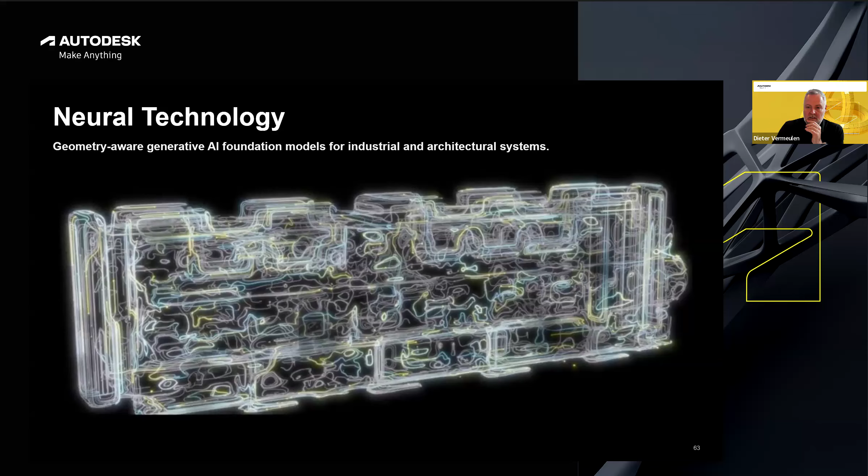In contrast, generative AI employs machine learning. This is a probabilistic approach, where the same input can generate a different output each time. Although it's typically easier to use and produces results much faster, how the computer achieves those results can be a real mystery. So we now face a future where we can combine the precision and control of generative design with the ease of use, speed, and expressiveness of generative AI.

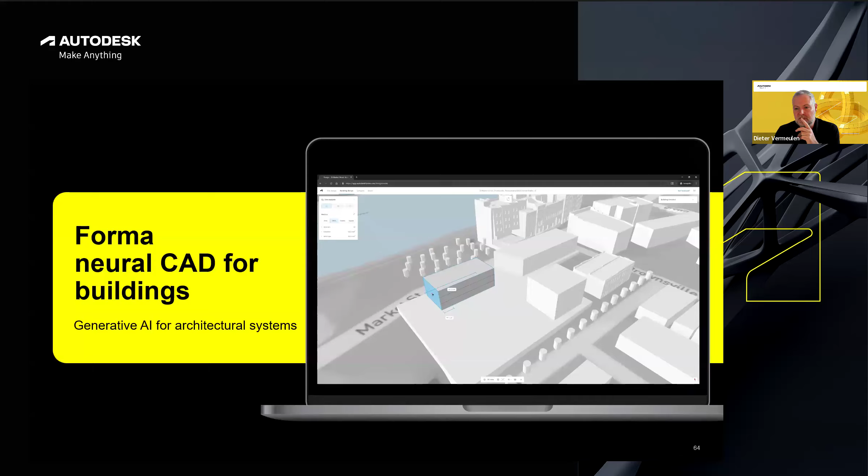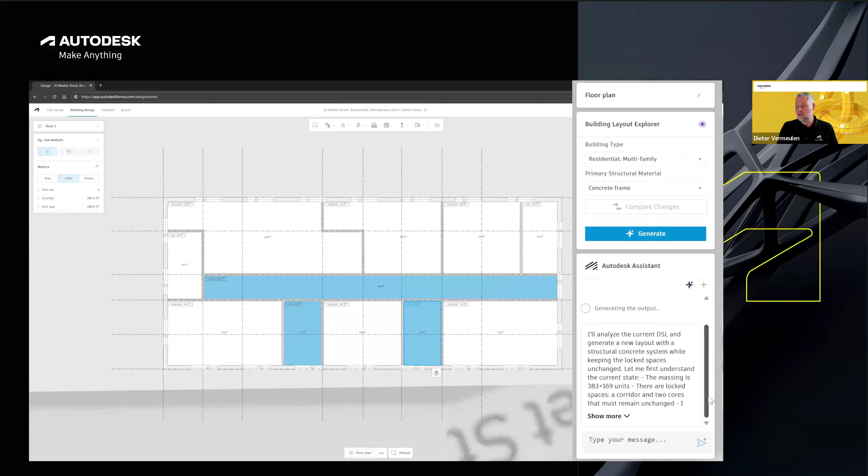So we are introducing now these Gen AI foundation models that are trained on professional design data. We refer to these groundbreaking AI foundation models as what we call neural technology, and we expect that it will evolve quickly to create an entirely new type of design and make software. Our first proof points for this technology are the new neural CAD-aware models in products such as Fusion and Forma. We already announced this groundbreaking industry-specific Gen AI, trained on both CAD objects, industrial and architectural systems, moving far beyond the practice of only incorporating large language models into existing solutions.

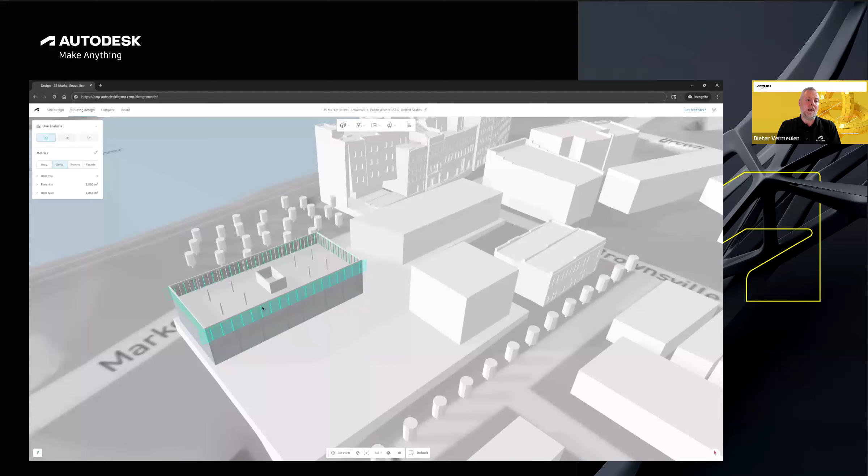If we look at one of our examples within AECO, this is our first AEC-related foundation model, which is neural CAD for buildings in Forma. It's enabling architects to quickly transition between early design concepts and more detailed building layouts and systems. We call it Building Layout Explorer, and it will translate between an architectural massing model and a building floor plan layout, so changes to one architectural system are reflected in the other.

At Autodesk, we are envisioning an exciting future with this, especially where additional architectural systems can be generated with prompts, including preliminary structural engineering plans like you see here, and more. This foundation model is rapidly discovering alignments and common patterns between those different representations and different aspects of building systems.

So this is future—it looks like you can access it already, but this is future. This is the neural technology, neural CAD. This is the next stage you will be in when taking that step into AI. So think about it and how you want to incorporate AI in your company. Remember that progression I showed from CAD to BIM, to connected BIM, to outcome-based BIM, and further into AI-powered BIM. With that, I want to leave you with that thought.